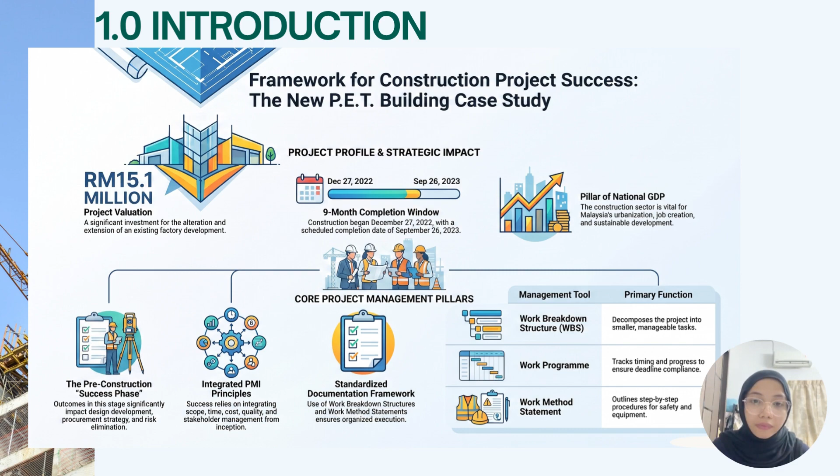To support effective implementation, the project relies on several management tools. This includes the work breakdown structure, which divides the project into manageable work packages, the work program, which plans and monitors the construction schedule, and the work method statement, which provides detailed procedures for carrying out construction work safely and efficiently. Together, these elements create a structured framework that supports effective project management and successful project delivery.

This slide presents the overall profile of the project based on the contract documents provided. The selected project is the new PET building, also known as Stock 6, which forms part of the proposed alteration and extension to existing factory development located at Seri Iskandar Technology Park, Perak. According to the contract documents, the project carries a total contract sum of 15.1 million ringgit and is scheduled to be completed within 9 months.

This relatively short construction period requires careful planning, efficient resource allocation, and close coordination among all project stakeholders to ensure that the project is completed on time. The scope of works includes major construction activities such as site clearance and earthwork, structural works, roofing installation, and the complete mechanical and electrical services, all of which are essential for delivering a fully functional industrial building.

The project is supported by a multidisciplinary consultant team. Kers Production Malaysia Sdn Bhd acts as the employer and project owner. Perunding YSL Sdn Bhd is appointed as the civil and structural engineer and superintending officer responsible for supervising the structural works and administering the contract. Perunding KYS Sdn Bhd oversees the mechanical and electrical engineering services, while ARH Juruukur Bahan Sdn Bhd is responsible for cost management, contract documentation, and financial administration throughout the project.

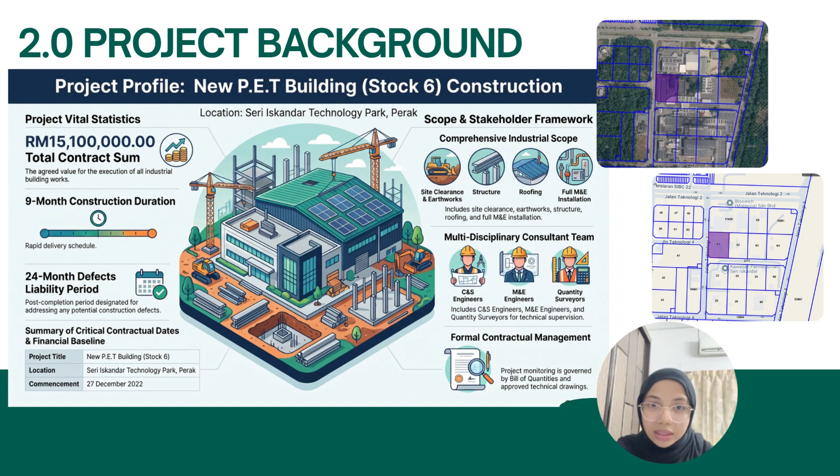Overall, the project is managed through formal contract documentation, bills of quantities, and approved technical drawings, ensuring that construction activities are carried out in accordance with the required standards, contractual obligations, and project objectives.

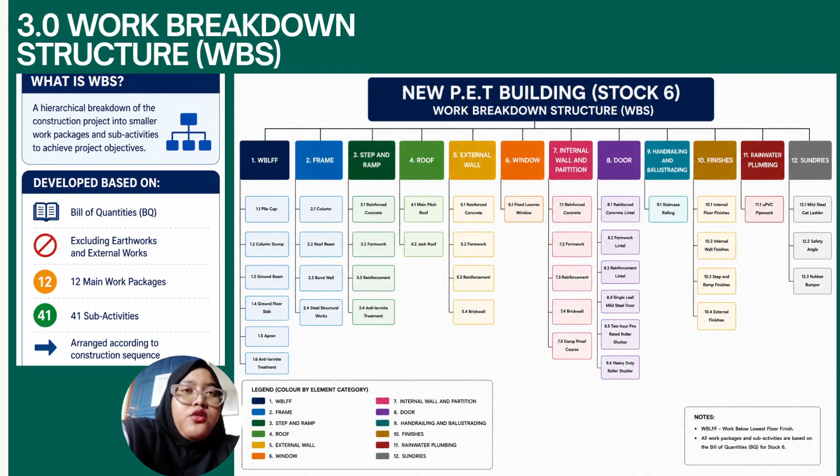So now let's proceed to the next slide. Next, I will explain how the work breakdown structure was developed.

The first step was reviewing the bill of quantities and contract document to understand the overall scope of work for the project. Next, we identify all the major building elements involved in the construction, such as the foundation, structural frame, roof, walls, doors, windows, finishes, and other building components.

These building elements were then grouped into 12 main work packages, which represent the major sections of the project. Each work package was further divided into smaller sub-activities.

For example, on the right side of the slide, under WBLFF, the sub-activities include pile cap, column stump, ground beam, ground floor slab, apron, and anti-termite treatment. Similarly, the frame package consists of column, roof beam, bund walls, and structural steelworks, while the roof package includes the main pitch roof and jack roof.

The same approach is applied to all the remaining work packages until the final package, which is sundries. This systematic breakdown makes every activity easier to organize, schedule, assign to different construction teams, and monitor throughout the project. Overall, the WBS provides a clear structure for managing the project because it improves planning, coordination, communication, and progress monitoring.

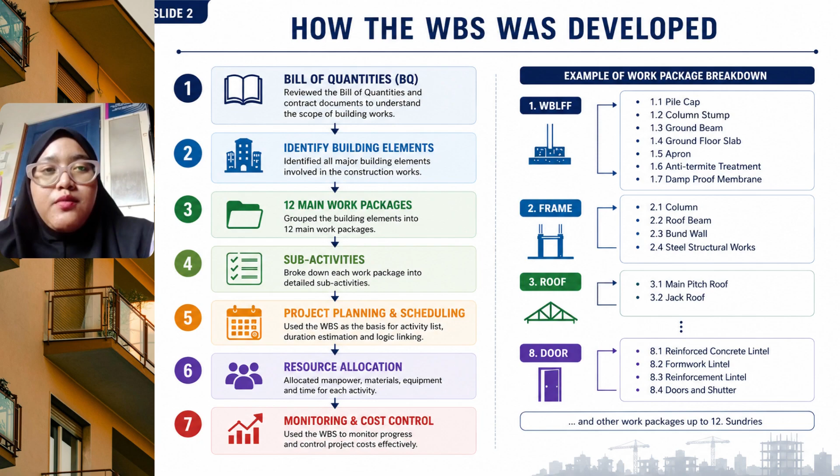Now I will present about project scheduling for the proposed project, which was developed using Microsoft Project. Microsoft Project is a project management software that helps us plan, organize, monitor and control construction activities throughout the project. It also allows us to create a realistic project schedule, assign tasks, duration, establish activity relationships and monitor project progress effectively.

For this project, the total construction duration is 238 days. The project is scheduled to start on 29 December 2022 and is expected to be completed on 26 September 2023. This schedule was prepared based on the construction sequence and the activities listed in the BQ.

Now we move on to the activity list. The activity list was prepared based on the BQ and the standard construction sequence. A total of 15 bills were identified and arranged in a logical order to ensure that every construction activity is properly planned. The activities include foundation work, structural works, architecture works, finishing works, rainwater plumbing, and sundries.

Preparing a complete activity list is important because it ensures that no construction work is missed during the planning stage, and allows the contractor to organize the work more efficiently.

We go to duration estimation. The overall project duration is 238 days. The duration for each activity was estimated based on several important factors such as project size, construction method, labor productivity, material availability, equipment availability, and the contractor's experience.

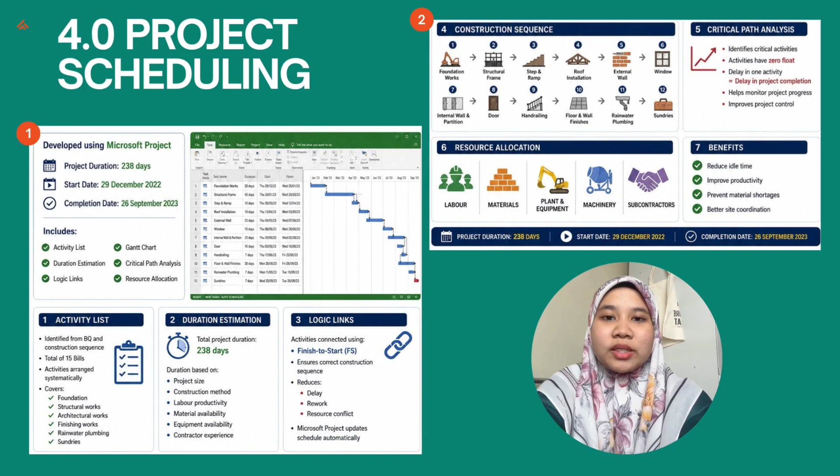This slide shows the first part of the Gantt chart created using Microsoft Project. The total project duration is 238 days, starting on 29 December 2022 and ending on 26 September 2023. The project begins with Bill number 1, which is the foundation works. These activities include excavation for pile cap, trench excavation, hardcore, lean concrete, reinforced concrete, formwork, and reinforcement. These works are carried out sequentially because the foundation must be completed before any structural work can begin.

After completing the foundation, the project proceeds to Bill number 2, which is frames, where the reinforced concrete structure, formwork, reinforcement, steel structure works, roof structure, connection plates, and bolts are installed. Once the main structural frame is completed, the project continues with Bill number 3, which is step and ramp, and finally starts the roof construction under Bill number 4. This sequence ensures the building has a stable structure before moving on to architectural works.

This slide also presents the second phase of the construction schedule, which mainly focuses on the architectural works. After the structural frame and roof are completed, the project continues with Bill number 5, which is external wall, including wall demolition, reinforced concrete stiffeners, brickwork, damp-proof course, and reinforcement. Next, Bill number 6 involves the installation of aluminium fixed louvers window, followed by Bill number 7, internal wall and partitions, where reinforced concrete stiffeners, brick walls, and damp-proof course are constructed to divide the internal spaces.

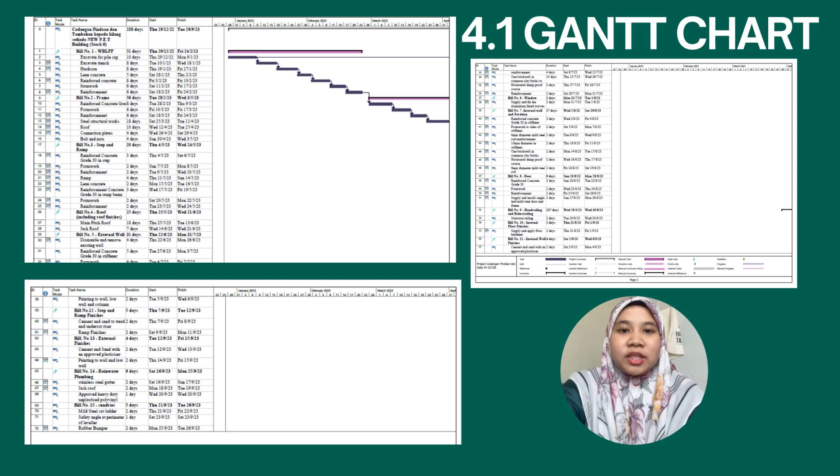Finally, Bill number 15, sundries, includes the installation of the mild steel cat ladder, safety angle, and rubber bumpers. They are the final construction activities before project completion. After all works are successfully completed, the project finished on 26 September 2023, marking the completion of the...

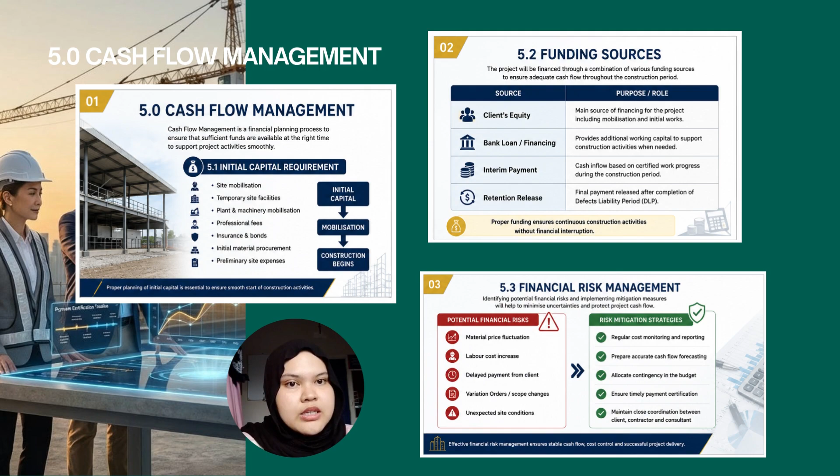The second component is funding sources, where the project is mainly financed through the client equity, supported by bank loan or financing, interim payment and retention release after the defect liability period. Lastly, financial risk management focuses on controlling risks such as material price fluctuation, labor cost increases and delayed payment through proper cash flow forecasting, cost monitoring and also contingency planning.

Let's move on to the method statement matrix. It's a document that describes the systematic procedure for carrying out construction work safely and efficiently in accordance with the approved drawing and project specification. It serves as a guideline to ensure that construction activities are carried out systematically and according to the project requirement.

For this project, the selected major works item is internal wall and partition works, which was developed based on Bill number 7 in the Bill of Quantities (BQ), together with the contract drawing and project specification. As shown in the method statement matrix, each activity identifies the work sequence, quantity, required resources, duration, health, safety and environmental requirements, as well as the corresponding construction costs.

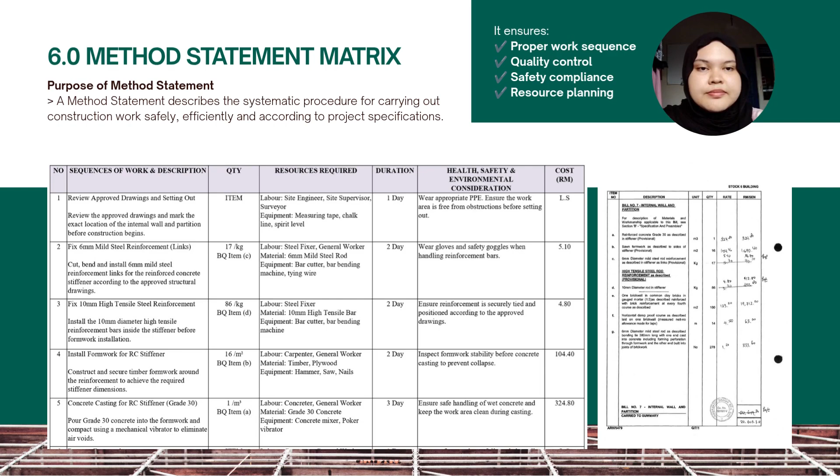Continuing with the method statement matrix, the internal wall and partition works consist of 11 main construction activities arranged in a logical sequence. The work begins with reviewing the approved drawing and setting out, followed by installing the 6mm mild steel reinforcement and 10mm high tensile reinforcement for the reinforced concrete stiffener. Next, timber formwork is erected before grade 30 reinforced concrete is poured and compacted. Once the concrete has gained sufficient strength, the formwork is removed.

The work then continues with the internal brick wall, followed by brick reinforcement, the damp-proof course (DPC), and finally the 6mm mild steel bonding tie to strengthen the connection between the reinforced concrete stiffener and the brick wall. The process ends with the final inspection and site clearing before handing over the work to the next construction activities.

Besides the work sequence, the method statement also highlights health, safety and environmental considerations. Workers must wear appropriate PPE, follow site safety procedures, and practice proper waste management to ensure that the works are carried out safely and efficiently.

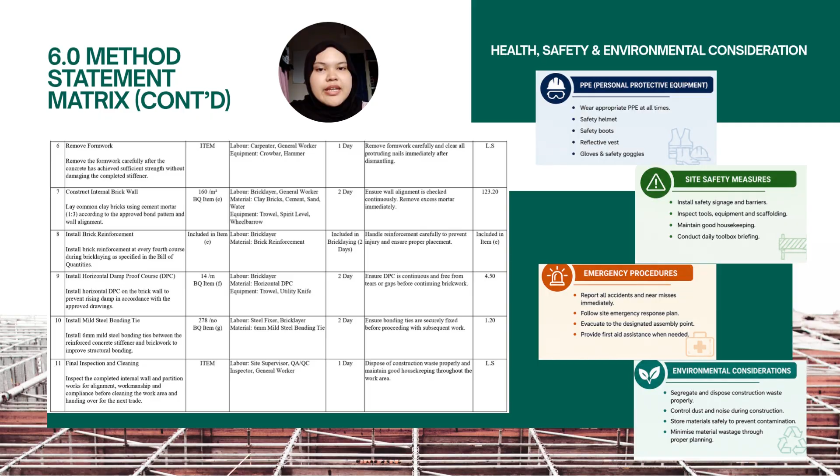Finally, I will present discussion and reflection. Overall, the proposed project planning is considered feasible because the work breakdown structure, project schedule, cash flow management, and method statement matrix were prepared systematically based on the contract document and bill of quantities.

However, several challenges were encountered, particularly in interpreting the BQ, determining the correct construction sequence, and preparing a realistic project schedule. Despite these challenges, this assignment improved our understanding of construction project planning while strengthening our technical knowledge, teamwork, communication and problem-solving skills, which will be valuable in our future careers as quantity surveyors (QS).